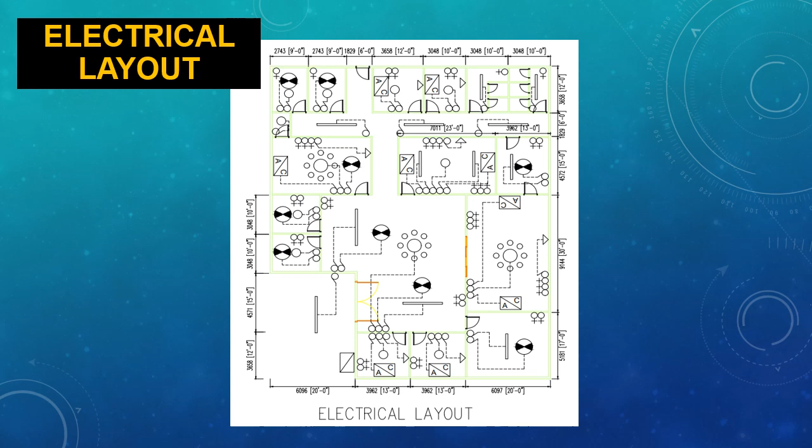I want to explain the methodology for these projects. There are 4 general methods for these projects. The first one is site clearance, the second one is excavation, the third one is concrete work, and lastly is the piling works.

Okay, let's see. First of all, about site clearance, referring to SMM2, we know site clearance is an important step in construction projects. We need removal of existing material like garbage, structures, tree uprooting, topsoil stripping, and grading. Okay, the general methodology for site clearance. There are 10 steps for this method.

The first step is to determine the existing state of the land and the debris that needs to be removed. The second step is developing a strategy for clearing grass, rocks, and debris as well as determining the necessary equipment. The third one is clearing debris, dismantling existing structures, and making sure the site is graded and unclogged.

Step number 4, surveying and defining the ROW. ROW means right of way and work limits. Step number 5 is general site clearance within the scope of works. Step number 6, OGL means original ground level survey by a licensed surveyor. Okay, and next is removal and disposal.

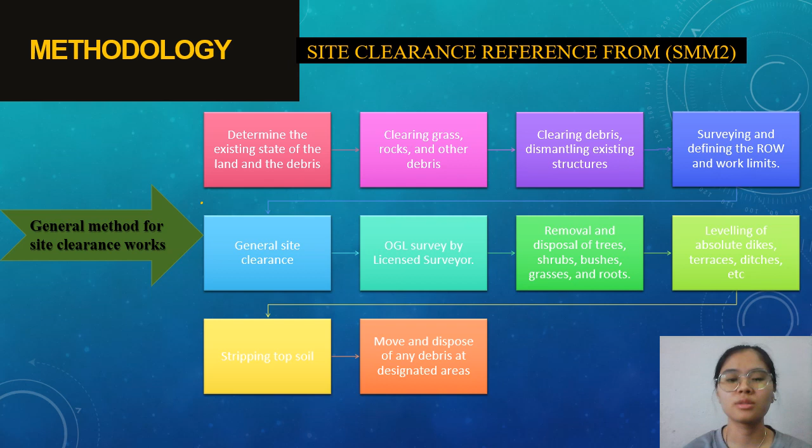Okay, the second method is excavation, referring to SMM2. Excavating is a critical step in construction projects. We need to remove soil, rock, or other material from a location to create an open face, retaining wall, shaft, drive, and tunnels. The general method for the excavation work has 7 steps.

The first step is site preparation. Existing surveys are checked and information regarding services that may have been installed below the ground is obtained. The site survey is used to mark out the line and level of the excavation for the foundation, as shown in the approved drawing.

Step number 2 is excavation. Before beginning work, the excavation area is carefully demarcated and cleared. To avoid over-excavation, a surveyor checks the depth of the excavation on a periodic basis. The bank slope is 13 degrees and maintained to prevent it from collapsing into the excavation area.

Next, step number 3, material management. Excavated material is stored at least 1 meter from the edge of the excavation in the location authorized by the engineer. Step number 4 is safety measures. Safety measures are taken during all excavation work, including the use of suitable safety barriers, signboards, and warning signs.

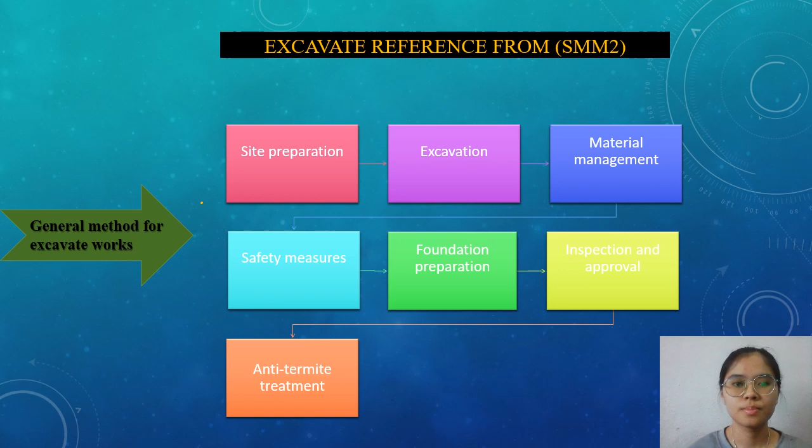231202071. Today, I would like to share about the methodology part of concrete work referred from SMM2. Concrete work consists of multiple stages requiring meticulous planning and execution. The general method for concrete work has 7 steps. First is formwork fabrication and installation.

For formwork fabrication and installation, timber formwork is employed when a small amount of formwork is required. Steel formwork is utilized to maximize formwork reusability. The formwork is intended to meet the structural parameters specified in the construction blueprint. It should allow for upright concrete laying and vibration. Before setting the concrete, the formwork is treated with an approved release agent.

Second is foundation preparation. For foundation, as soon as the excavation reaches the required depth and elevation, the surface is leveled and compacted to 95% of maximum dry density or MDD. Before the compaction starts, it is ensured that the excavated level is free from standing water or excessive moisture content.

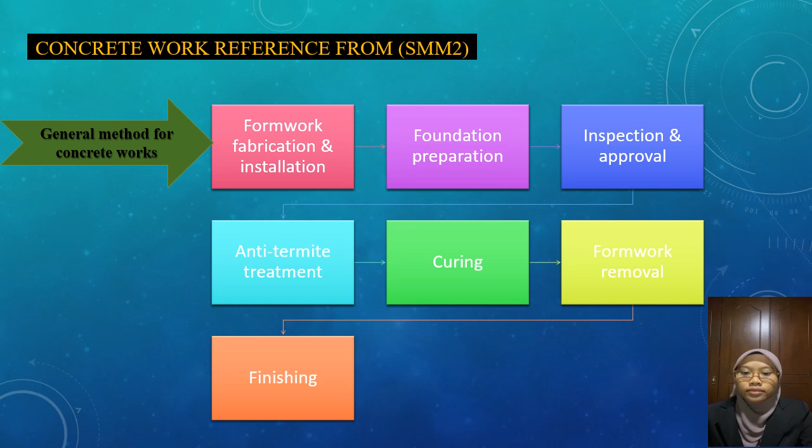Lastly is finishing. After the formwork is removed, any necessary finishing operations are carried out. This could include surface treatment, painting, and waterproofing. For the last methodology is piling work referred from SMM2. Piling is a critical process in a construction project. Piles are installed to uniformly distribute the structure's weight. The general methodology for piling work has 4 steps.

First is preparation. Ensure that the essential equipment and tools are available, such as drilling rig, concrete pump, concrete pressure hose, vibro hammers, JCB dump truck for debris removal, plate compactor, pump, box-cut telehandler, and manual shovel. Second is platform and clearance requirement. The site should have proper access and egress. If there are any underground utility cables, pipes or drains on the site, they should be repositioned.

Third is curing. After the concrete has been poured, it needs to be kept moist to allow it to cure properly. This is usually done by spraying water on the concrete surface at regular intervals. Formwork removal. The formwork is removed after the concrete has achieved sufficient strength. The timing of this depends on several factors including the type of concrete used, the ambient temperature, and the load that the concrete element will bear. Lastly is finishing. After the formwork is removed, any necessary finishing operations are carried out. This could include surface treatment, painting, or waterproofing.

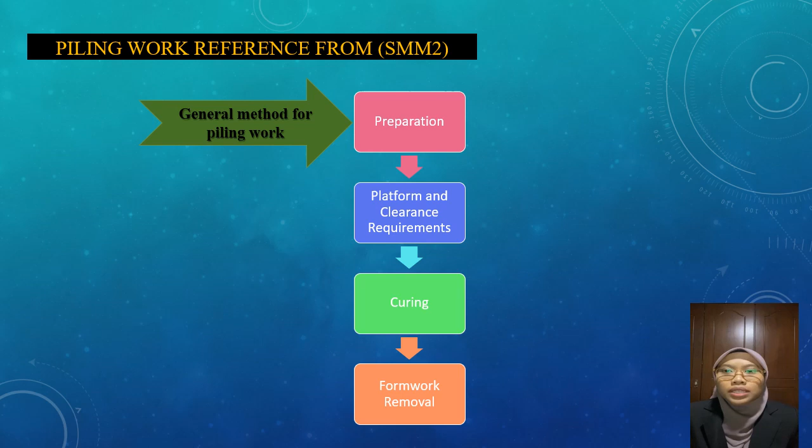The scope of work carried out in this project is site clearance, excavation, concrete work, and piling work. Site clearance is the first phase of any building project. It involves removing any items on the property that may obstruct the construction process, such as shrubs, plants, rock, and other waste. Next is excavation. Excavation is an important aspect of construction operation. It is the process of removing earth, rock, and other materials from a location in order to create an open face, hole, or cavity using tools, machinery, or explosives.

Then, concrete work is an essential component of a construction project. It involves the proper preparation, delivery, and application of concrete, a composite material produced from cement, aggregate, sand, gravel, or stone, and water. Lastly is piling work. Piling work is an essential component of construction operation. It entails the practice of drilling foundations through the earth to add structural strength to the soil underneath.

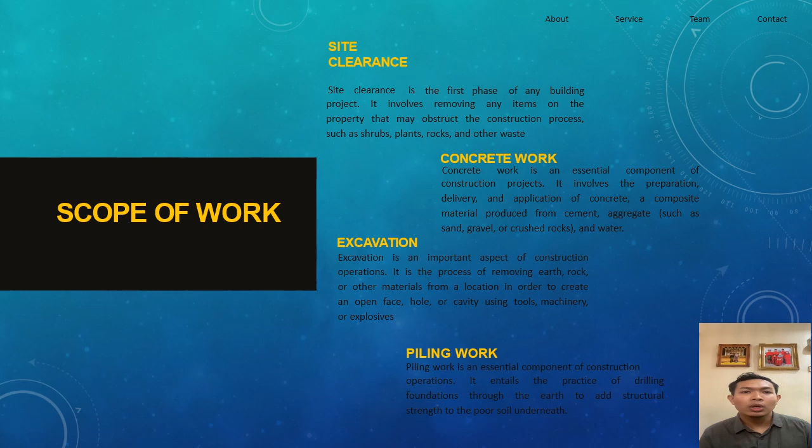Assalamualaikum and good morning. Today I'm going to present about the site clearance of the office building for the university. So the first one, we need to remove the topsoil. So I assume in the drawing there are no hedges and etc.

Second, we need the calculation for the site clearance for removing topsoil. So the description is excavation for removing topsoil not exceeding 0.25 meter. The unit we need to use is meter square and the quantity is 1284.035. We get the quantity because 36.17 times 35.50 equals 1284.04. That's the area for the site clearance.

So from that, we see that the length for the site clearance is 35170. We need to add 500 and add another 500. So we get 36.17. For the width, we get 34254, and we need to add 500 and add another 750. So we get 35504. So we need to multiply that and we get the quantity for the site clearance, 1284.04. Okay, for the next one, the only item for the site clearance is remove topsoil.

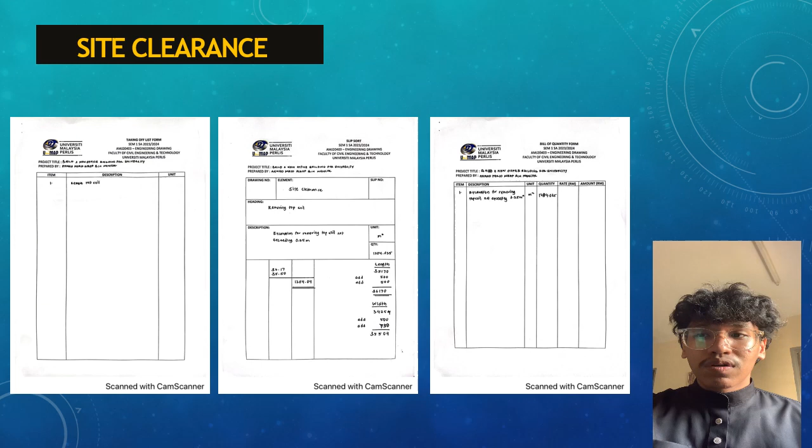My name is Muhammad Fadlul Arif bin Muhammad Fauzi. Today I want to present about bill of quantities concrete work. Bill of quantities concrete work has two BQs, one pile cap and second formwork.

The first is pile cap; we have used the taking off list form. In the taking off list form, we have used 7 items, and in the description we write concrete work for pile 1/300 pile cap size, length 1000 and width 1000 mm and height 900 mm. For all 7 items, we have used unit meter cube.

And second, we have used the slip sort form. In element, we have written pad footing, and for heading, reinforced concrete for pad footing, and the description is written the same as in the taking off list form, which is concrete work for pile 1/300 pile cap size, length 1000, width 1000 and height 900 mm. Each size for the 7 items is different.

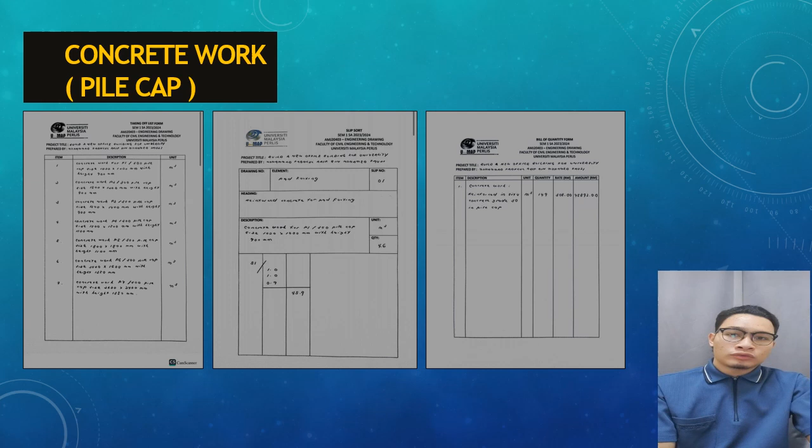And third, we have used the bill of quantity form. In the pile cap bill of quantity form, we write reinforced in situ concrete, concrete grade 30 in pile cap. In the bill of quantities, we get to know how much amount in ringgit we want to use in the project.

Second, okay, we continue with the formwork presentation. Now, for formwork we have used taking off list form 2 and written 7 items because we have 7 types of pile cap, and in the description we have to write formwork for pile cap, pile 1 size, width, length and height. The unit we use in the taking off list form of formwork is meter square.

Second, we have to write a slip sort too, and in the element of the slip sort form we should write pad footing, then heading formwork for pile cap P1, and the description is the same sentence as in the taking off list form.

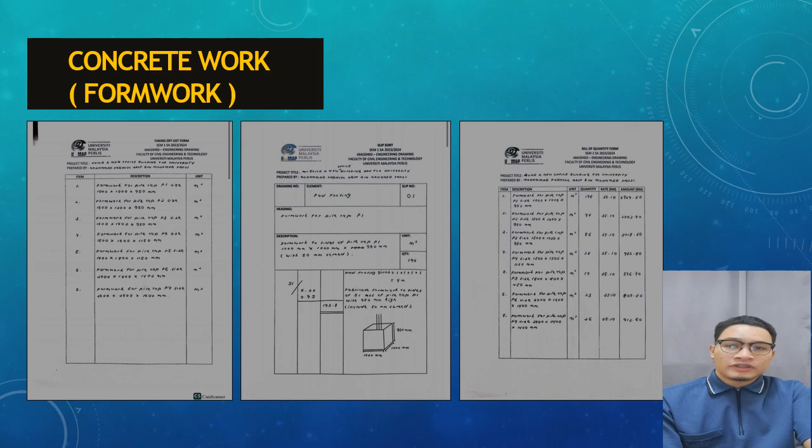Assalamualaikum warahmatullahi wabarakatuh. My name is Muhammad Aiman bin Bahari, matric number 2312020044. Today, I will present my mini project. My part is excavation for pile cap. Excavation is an important aspect of construction operation. Excavation for a pile cap involves the process of digging or removing soil to create a void in the ground where the pile cap will be constructed.

Okay, now we move to the taking off list form. There are 2 types of excavation. For description, number 1 is excavation to receive pile cap not exceeding 1 meter. The unit is meter cube. And number 2 is excavation to receive pile cap not exceeding 2 meters. The unit is meter cube also. After that, the conclusion for this project: there are 7 types of pile cap with different measurements.

For the calculation in the slip sort page, the element is excavation, the heading title is excavation pile cap, the description will be excavation to receive pile cap not exceeding 1 meter. The unit is meter cube. For pile cap number 1, the length is 1.0 meter, the width is 1.00 meter, the depth is 0.90. After we add the lean concrete 0.05, the depth will be 0.95 meter.

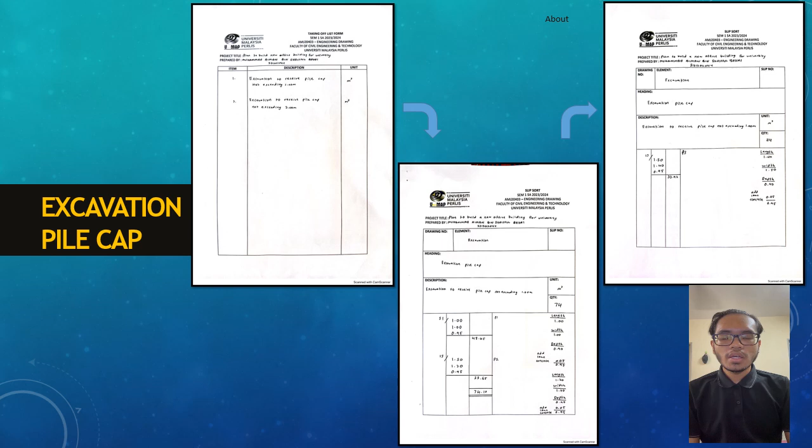Okay, for the pile cap type number 3, the length is 1.4, the width is 1.5, the depth is 0.90. After we add lean concrete, 0.05, the depth will be 0.95. So the calculation for pile cap type number 3 will be 1.5 times 1.4 times 0.95 and times 17. The answer will be 33.92. In the quantity part of the dim sheet, we will put it as 34.

Okay, for the pile cap number 4, the element is excavation. The heading is excavation pile cap. The description for pile cap number 4, it will be excavation to receive pile cap not exceeding 2.00 meter. Unit still same is meter cube.

So for the pile cap type number 4, the length is 1.5, the width is 1.5, the depth is 1.10. After we add lean concrete 0.05, the depth will be 1.15 meter. So the calculation for pile cap type number 4, it will be 1.5 times 1.5 times 1.15 times 4. The answer will be 10.35. So at the quantity part, we will put it as 10 meter cube.

Okay, for pile cap number 5, the length is 1.8, the width is 1.8, the depth is 1.10. After we add lean concrete 0.05, the depth will be 1.15. The calculation for type 5 pile cap, it will be 1.8 times 1.8 times 1.15 and times 2. The answer will be 7.45. So we will put it at quantity part as 7 meter cube.

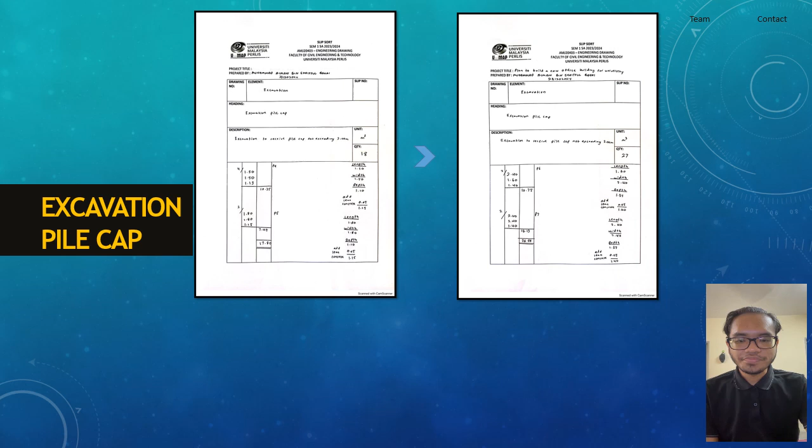Thank you. I cover work involving piling work in the project area. I need to prepare a taking off list to identify the work done for piling work. In this taking off list form, I have stated in the piling work that involve initial pile, total driven depth, extension pile, and testing. All of these mentioned above refer to the given piling plan. Then, after finishing that, I need to prepare a dim sheet form to identify the quantity that will be used in a project. The plan shows there are 7 types of pile that each have a different number.

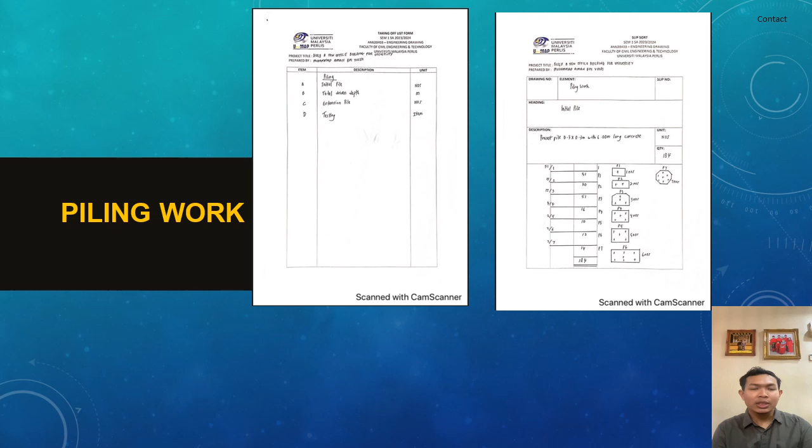For the first dim sheet, I will explain about the initial pile by suggesting the size used, which is a precast pile 0.3 with 6 long meter concrete. After calculation, the total quantity obtained is 184. The unit used is NOS. For the next one I will calculate the driven depth. Driven depth suggested is 0.3 precast RC pile type with concrete mix grade 30/20. After calculation, I got a total quantity of

5,520 in meter units. For the third one I made a calculation about the extension pile, which is to use precast pile 0.3, 6.0 meter long, concrete mix grade 30/20. After calculating several types of pile, the number obtained is 552 in unit NOS. Finally, we need to do testing with the suggested dim sheet that is allowed for testing 3 multiply 3 by pile total of load 45 kN. The unit base is item.

For the bill of quantity, we need to rewrite the description on the dim sheet part of the bill of quantity section to calculate the price of all units used in this project. Each available rate has been calculated to get the amount for a unit. After calculating, the exact amount of the price has been obtained.

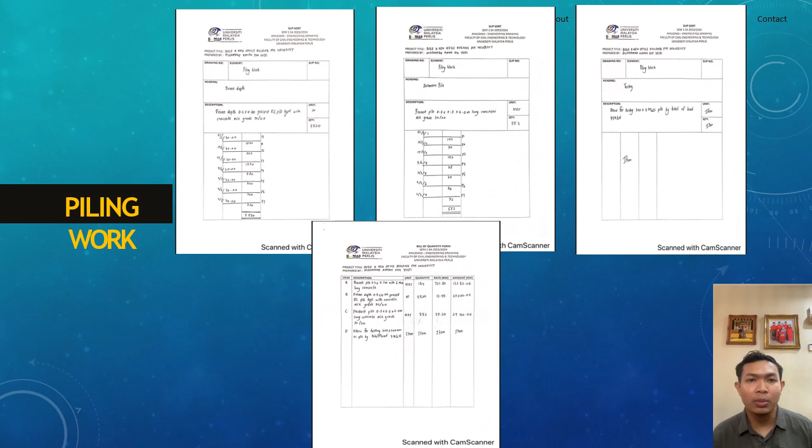In conclusion, we hope that the customer can accept us well and be pleased to include us in the tender process. And then we are confident that our company will apply the design well, that what we suggest will not only satisfy, but also achieve the goals and objectives. And then we certify that our organization is prepared to face the difficulties that come with a project. To realize this goal, our team is ready to work with the ministry and many stakeholders.

And finally, for demonstrating our ability to solve challenging issues and provide a great university office building.